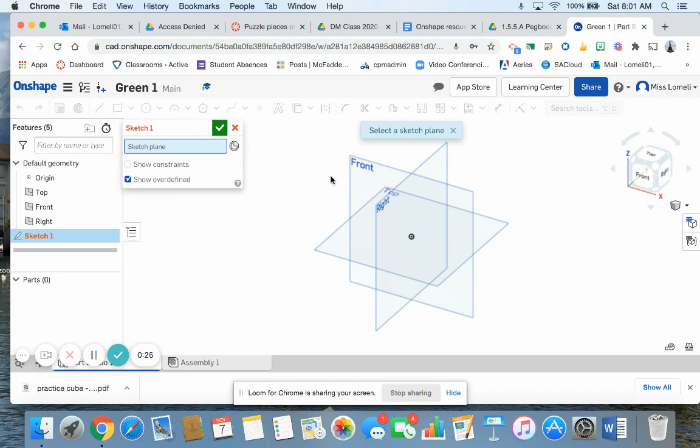Now my block is, I'll show you in class what it looks like. So I'm gonna create sketch on the front. I'm gonna click here so I can just see the front. Sketch is activated, I know it's activated because I have these tools.

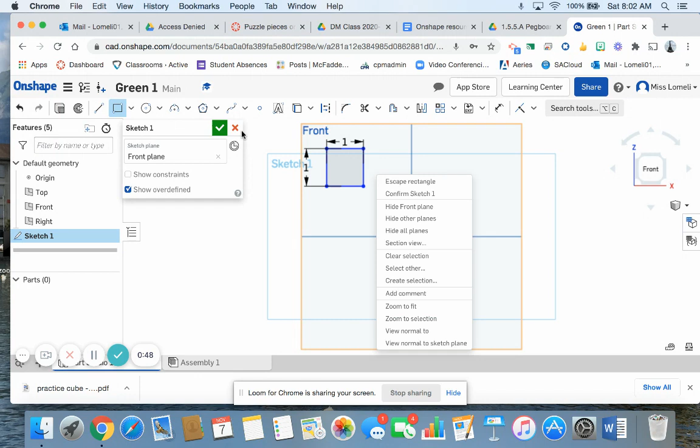So I'm going to click, 1, enter, 1, enter. Okay, so that's my first square, right? Now I hit OK, it's just a single square.

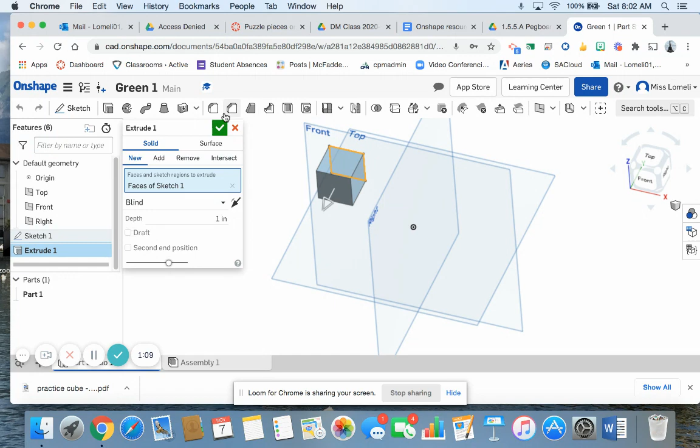Now I'm going to edit my square again, but I'm going to hit extrude. Extrude, now this is where you have some liberties. You can build each square at a time. I'll show you the basic way, and then I'll show you a shortcut.

So there's one, and you can continue creating extrusions on this one. One, so that's my 2 squares in one. And then I'm going to extrude here, another one, and that would be like a 4 square. And then I have this one sticking out right here.

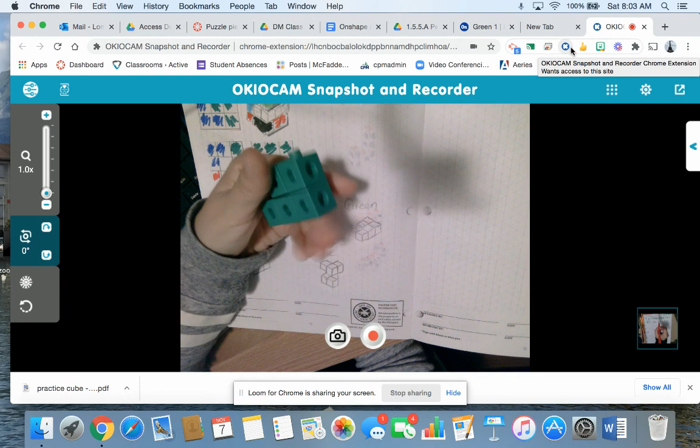Let me show you what it looks like, because I should have started with this. See if it opens. Yeah, so I'm building this actually like this. So what I just did was I built these 4, and I'm going to build this part right now. So let me go back.

So I need it right here. But if I hit this, it's going to extrude both of them and I don't want that. So I'm going to do a sketch on this, and be very careful where you draw your rectangle. I want it from this corner down, 1 by 1. You see, it's already 1 by 1. The number's 1 by 1. If it's not, then you can go ahead and type it in.

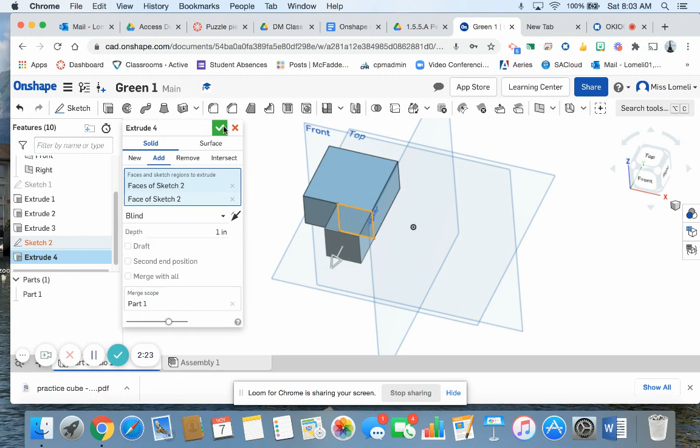And extrude this part only 1 inch. Okay, so now this part, see right here, looks like this. Now I'm gonna take another piece and build off. Okay, so that's one way to do it.

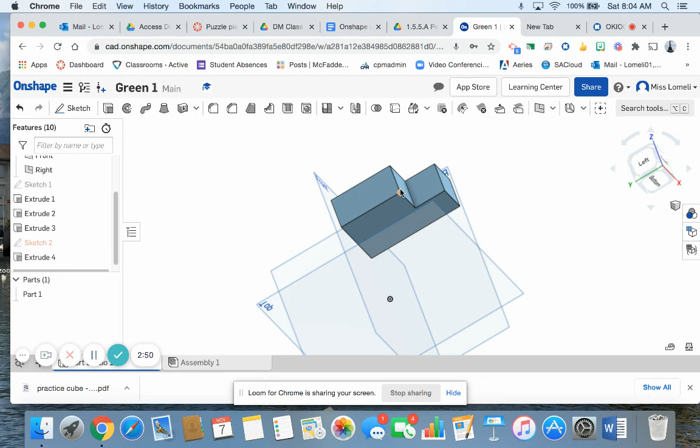Just create one square and then build off of it. Like if I was to go down here, I would. If you can extrude the whole shape, you can just click extrude. But if you need to extrude just a part of it, like this little part, then I would have to draw like a single 1 by 1 and then extrude that.

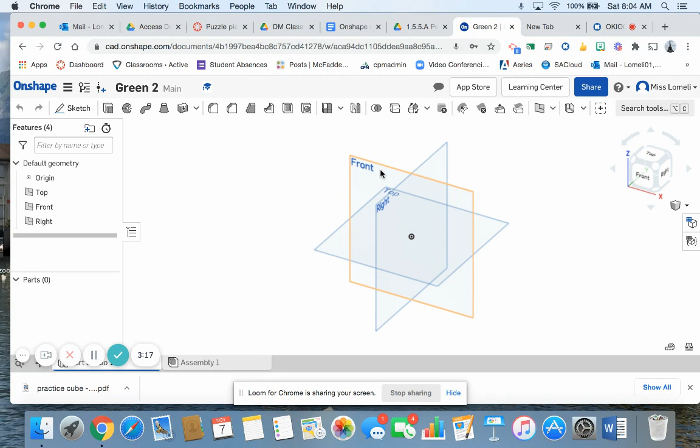Okay, now let me show you a different way of doing it. Create new document, let's go green 2. You're gonna find better ways to do this, you're gonna be like, you know what, Miss Lomeli, I kind of like it this way. That's cool, no big deal. Okay, sketch here, so 1 by 1, click, 1, enter, 1, enter, right?

I'm gonna hit extrude, 1 inch, defaults are perfect, there it is. Now what you could do is sketch here, you're gonna do another rectangle, it's gonna be very repetitive, and then extrude that 1 inch.

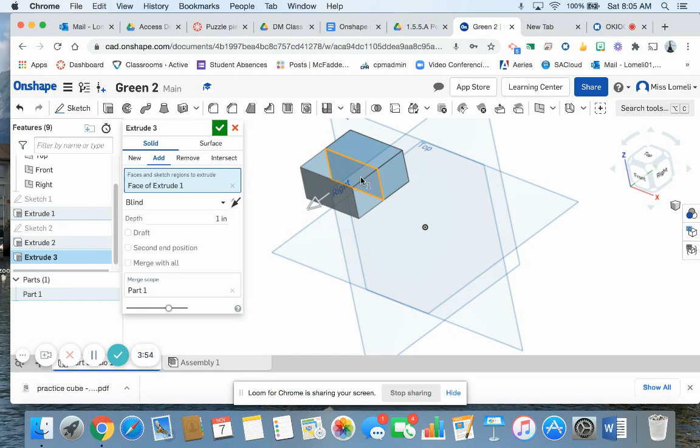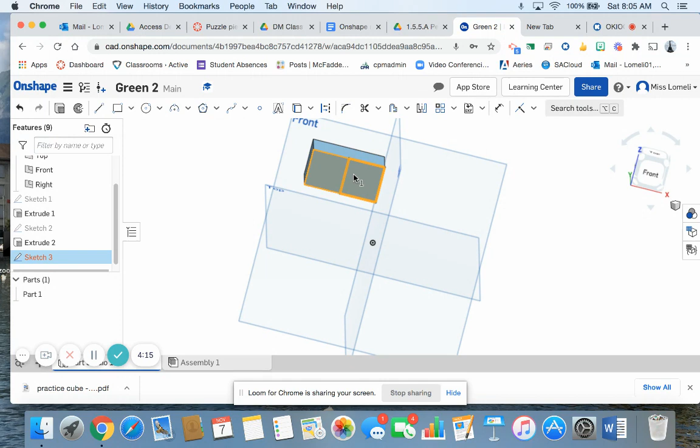And then I'm gonna do another sketch here, get rid of that, sketch here, and then I'm going to click in that corner right there, go down, kind of match it, enter 1, enter 1, enter, and then extrude that piece only, hit OK. So this is a different way of doing the exact same thing I did before, but this is just adding squares and adding squares and adding squares.

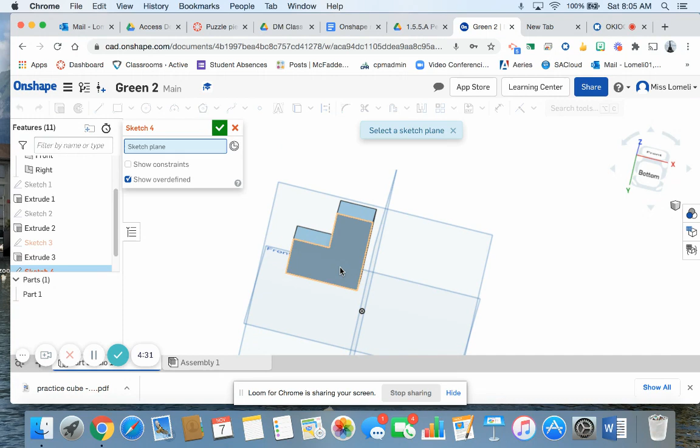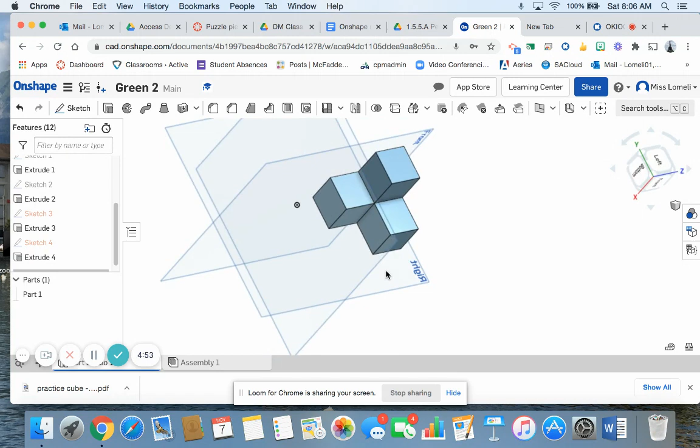Like if I were to do some randomness and do a sketch on this bottom part, and then do a rectangle, from this corner here, make sure it's 1, enter 1, and then I'm gonna hit this part to extrude, hit OK. So then I have this piece, looks like this. So that's one way of doing it, where you just add 1 inch blocks wherever it needs to be.

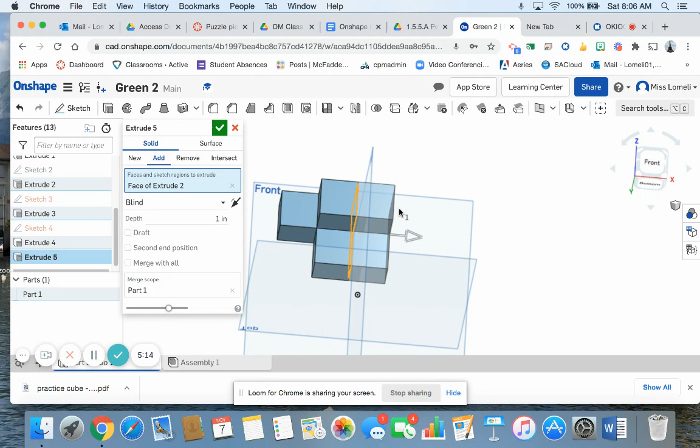Sometimes you need to do that. On the other example, at the beginning of the recording, I would extrude the whole thing. Like I'm gonna extrude this whole L, so I just click on it and it will double in size. You see how it's gonna double in size when I hit enter? Okay, that's one way of doing it.

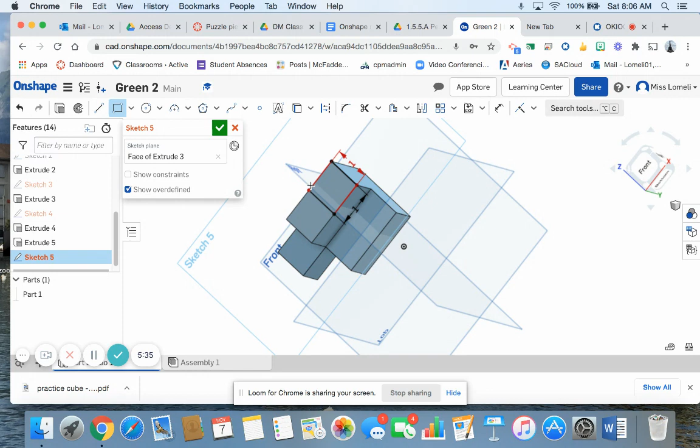You're just like, but you know what, I just need a square right here. If you don't want to extrude this whole rectangle and just want to extrude half of it, I would suggest you hit sketch, then draw your rectangle inside and make sure it's 1, enter, 1, enter, and then extrude just that part. And that way you're just extruding that. So whatever is yellow will be extruded, right?

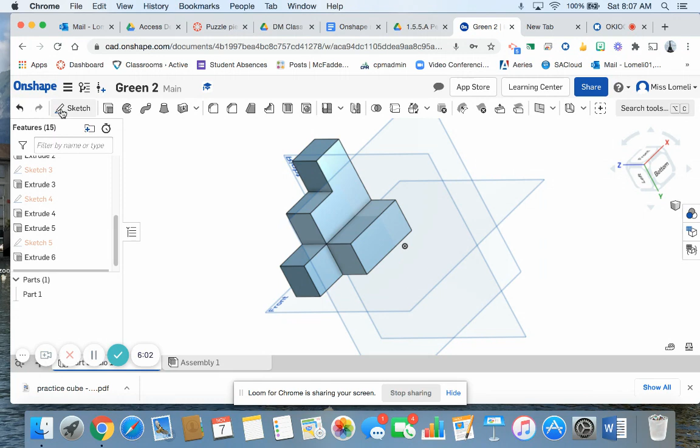So here I can extrude just this part, or that part, or that part that's yellow-orange. I want to extrude this whole thing or this whole thing, yeah. But if I just want half of it, the one by one, then I need to again hit sketch, hit the whole rectangle, and then draw in a smaller square inside. Make sure you start in a corner and make sure it's one by one, and okay.

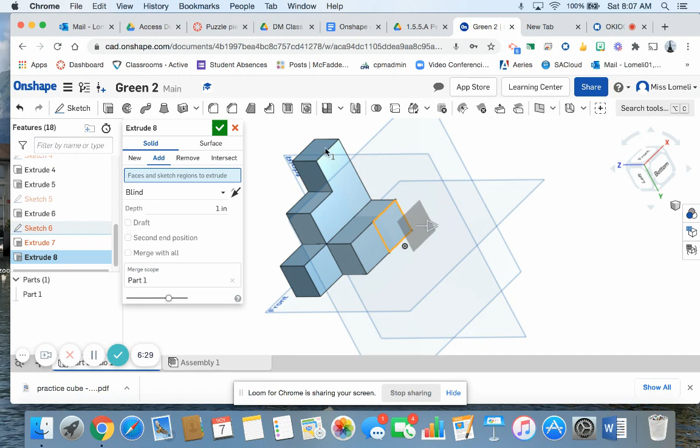So then you hit extrude and you see, I can get the option of the whole rectangle or just the little square. I just want the little square. Extrude the little square, check. Okay, make sure you hit that. So you just build one by one.

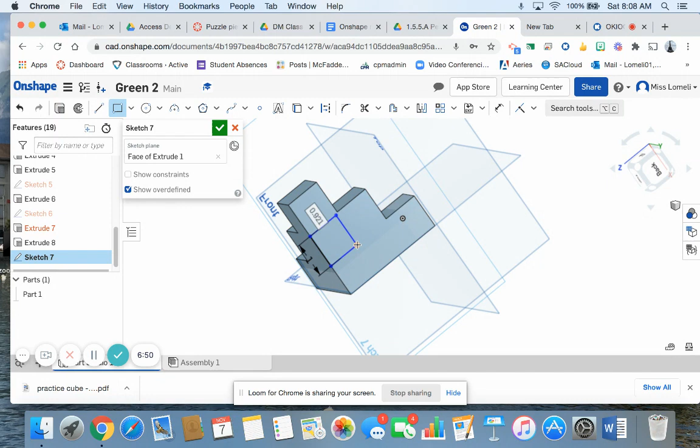Again, sketch, select this whole thing, but you know what, I just want that square to be right here. So 1, enter, 1, enter, and then extrude that square by 1. So I'm just extruding that one little piece out there. There you go.